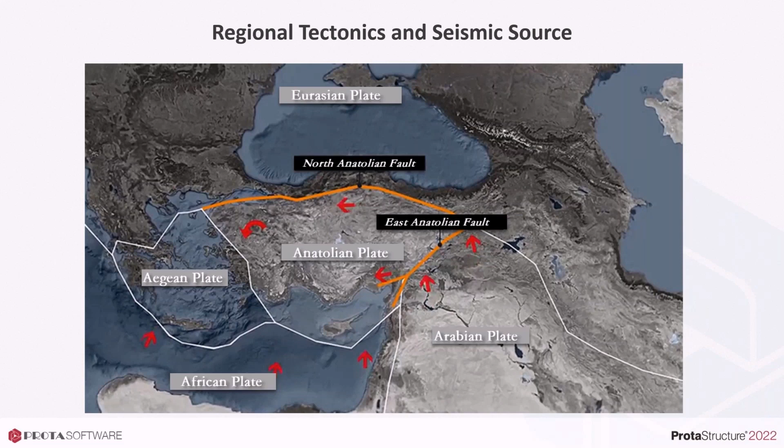Knowing this fact, Turkey is wired with a fine network of accelerometric stations on different types of soil conditions.

Here you see the PGA contours for the first earthquake. PGA, peak ground acceleration contours, are an important demand parameter regarding damage, since it is directly proportional to force. We measured PGA values up to 1.4 G in the first earthquake and 0.6 G in the second one. The white lines indicate the fault rupture in the two earthquakes. The PGA values are specifically high in the Antakya, Hatay region, possibly because of soil amplification.

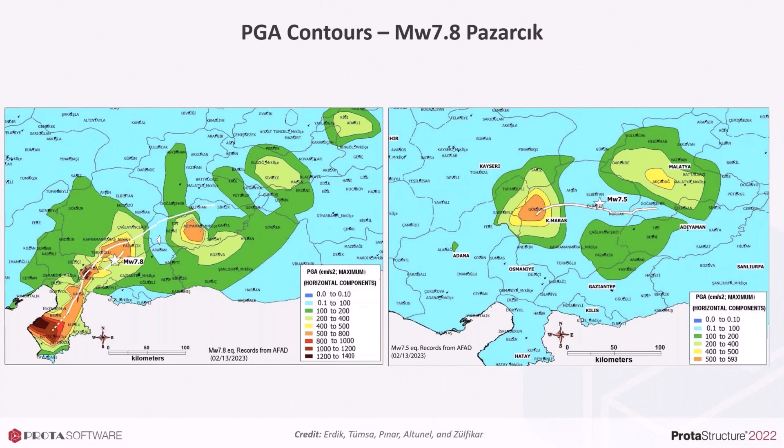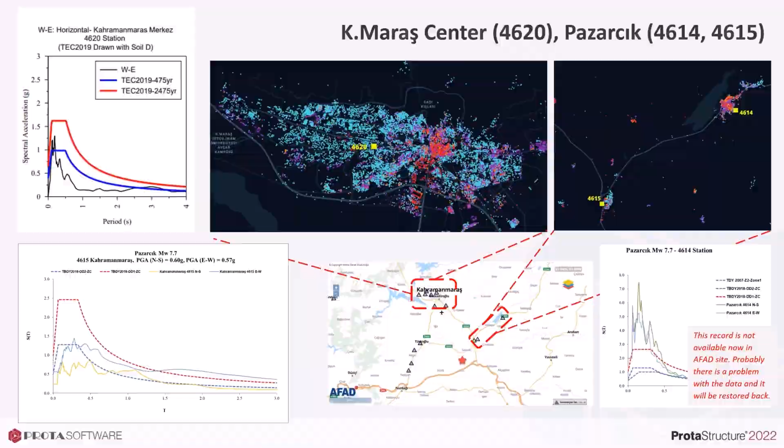A similar scenario is observed for Gaziantep. In the city center, the code spectra seem to estimate the spectral acceleration demands well, and the new buildings should not be suffering collapse from this level of acceleration.

The 0.6 G spectral acceleration can cause damage for very old or deficient buildings, that is, 2 to 5 stories. I'm talking about the spectral acceleration graph on the right.

But for the spectral acceleration graph on the left, measured in Islahiye, one of the provinces of Gaziantep, 2 to 5 story buildings suffered a 2G spectral acceleration.

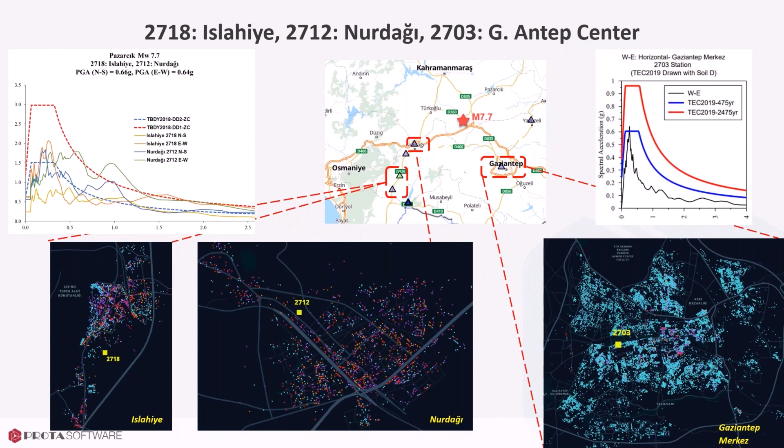Also in Nurdağı, another province, soil amplification is observed, and high spectral accelerations exceeding code values are experienced for 2 to 12 story buildings, which is basically the majority of the buildings.

Adana seems to be an interesting case. The observed spectral accelerations are under design and maximum considered earthquakes, and in the city center, the values are also low. Despite this fact, 18 buildings collapsed and 85 buildings are heavily damaged, waiting for demolition.

Collapsed buildings are between 12 and 20 stories, and it may not be immediately obvious from acceleration spectra, but when ADRS and spectral velocity graphs are plotted, it seems that buildings with 1 to 2 second periods seem to experience relatively larger demand in the city center.

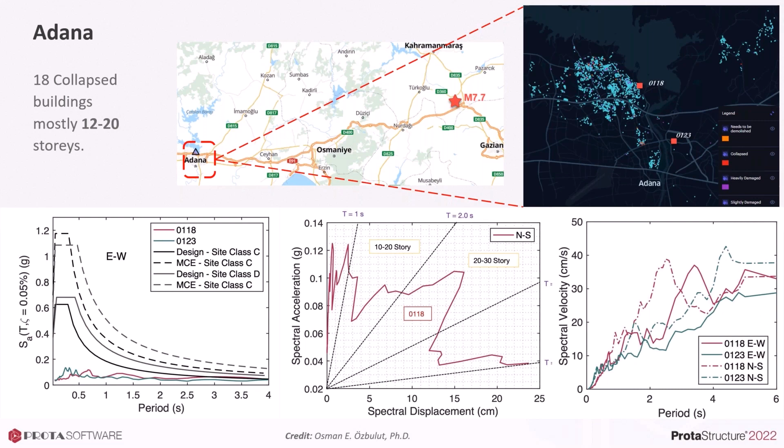After this overview, I'd like to show you some of the damage and structural deficiency that I observed in the earthquake region.

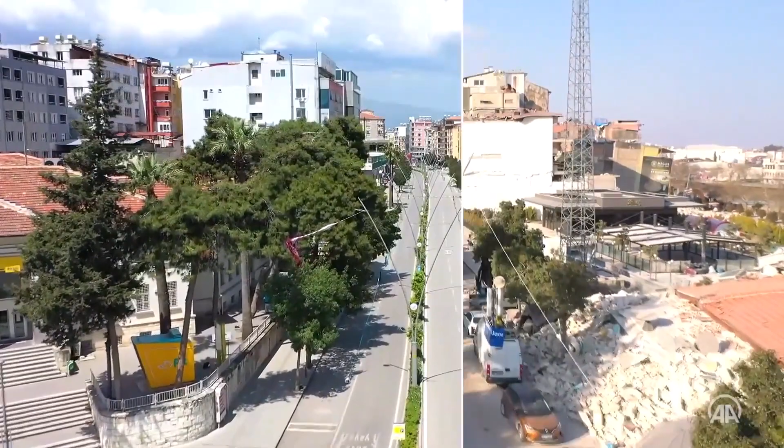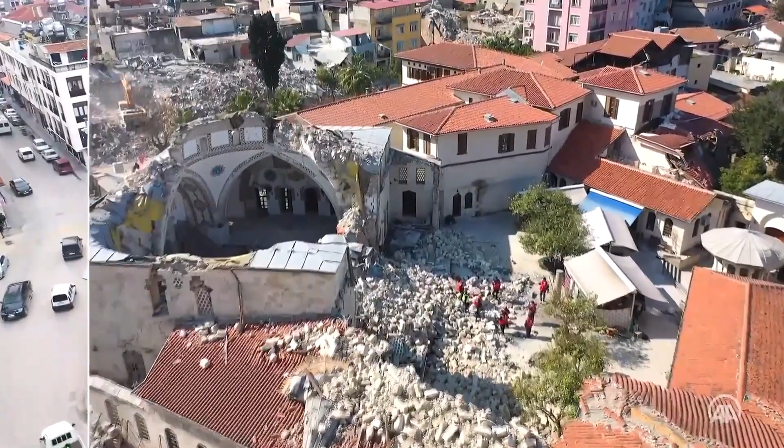Let's take a moment together and watch this aerial view that shows Hatay before and after the earthquake.

One of the mostly encountered damages regarding material quality is the brittle failure of rebars. In reinforced concretes, we don't really expect the reinforcement bars to fail like a brittle chalk. So these rebars are most likely untested and do not meet the production standards in terms of carbon content. The rebars should be ductile, not brittle.

Majority of the buildings in the region have insufficient lateral stiffness that results in, if not collapse, a high damage in structural and non-structural members. Unfortunately, it is not common practice to use shear walls in buildings in Turkey. If shear walls are used, the ratio of shear walls to total area is not usually sufficient, and they are mostly used in minimum dimensions required by the code. Also, architectural design does not allow the use of shear walls at the building perimeters. Combined with poor construction and poor supervision, frame-only structures are most likely to suffer damage or collapse. That's what we observed.

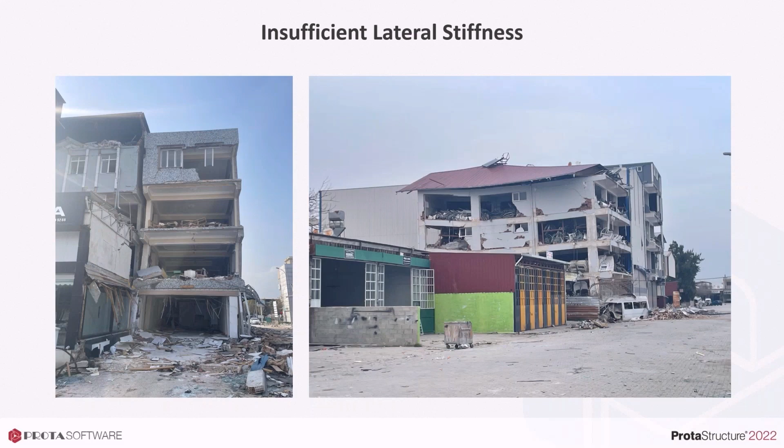These two examples are bad habits in Turkey's structural system formation. First, due to permit reasons and to enlarge the commercial area at the upper floors, heavy closed cantilever portions are used in the structural system. Also, architects prefer a flat ceiling and want light inside the room. So this results in discontinuous frames, as you can see in the pictures.

This is a typical floor plan that can be encountered in practice. The only shear walls are utilized in elevator and stair shafts, and they are asymmetrically positioned at the edge of the building, with building floor area enlarged at the upper floors using cantilevers. You can also see the beams missing on axis A, which creates an additional lack of lateral stiffness.

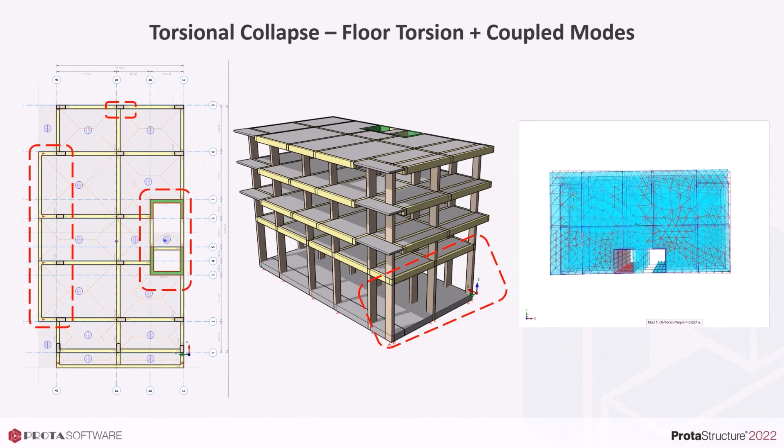This results in torsional irregularity and insufficient lateral stiffness, and also causes mode coupling. This is the observation in one of the buildings - it collapsed with a rotational movement.

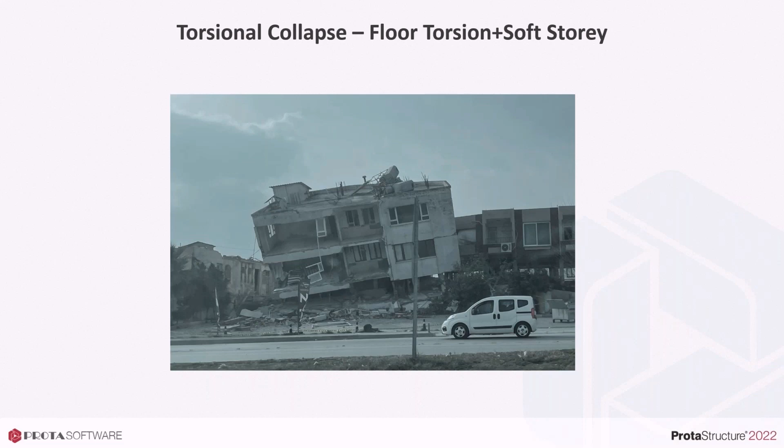Settlement and liquefaction issues are also observed on the site. The reason is construction on cohesionless alluvial deposits with high water table without any ground improvement, such as jet grouting, etc. We have also observed incidents of sand boiling and settlements in the basements, especially in the Iskenderun region. This means structural design itself is not sufficient - a good structural design is necessary, but also a good geotechnical design is necessary. If one of them is missing, you will observe damage in the foundation.

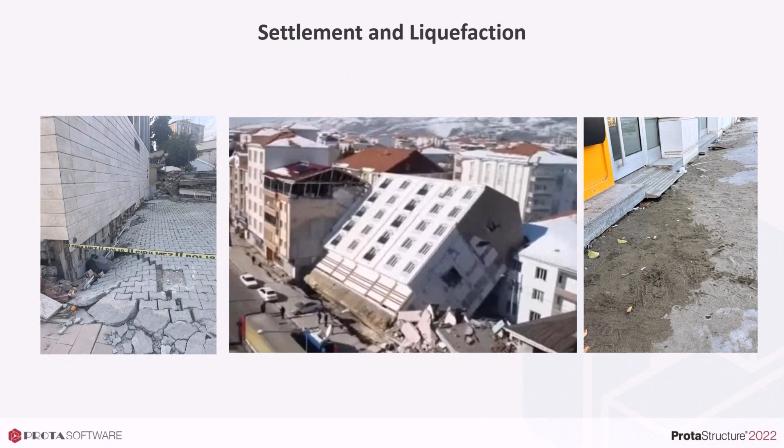This picture belongs to a famous residence complex in Antakya, which killed hundreds of its residents, unfortunately. Besides reported lack of detailing, material quality and segregation issues, the structural system itself seemed to have little tolerance for overturning. The three blocks are sitting on a common L-shaped monolithic basement, which is also considered to contribute to the damage and collapse. Due to the aspect ratio of the building, the structural system seemed to lack redundancy, and because of this, the columns and walls experienced a lot of axial stresses, bending stresses, and exceeded their capacities. And of course, the old buildings.

Turkey has a very large old building stock. According to Turkish Statistic Institution, approximately 50% of the buildings in the 11 affected cities are built before the year 2000. This is more or less the same for the entire country. 2001 is the year Turkey started utilizing building control regulations in 19 pilot cities, but it was only after 2011 that building control was in effect for all of the cities.

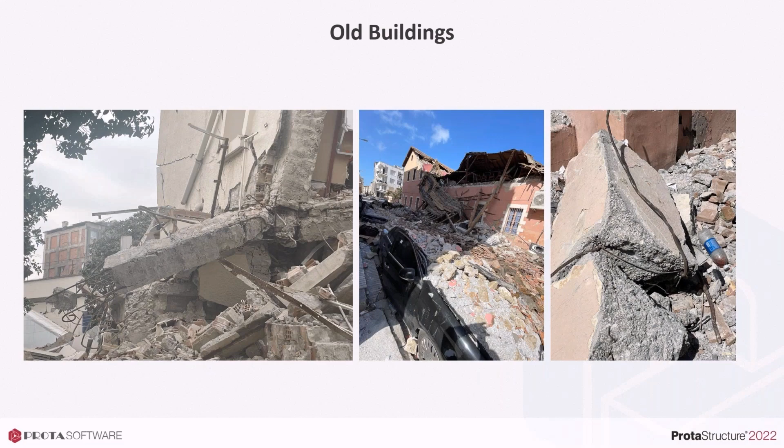So these were the observations in the earthquake region. After these insights on the earthquake that happened in Turkey, I'd like to also cover the seismic code coverage and parameters, what we do in Prota Structure to allow you to design safely against earthquakes.

First of all, Prota Structure supports a wide range of international seismic codes. The scope includes base shear calculation, irregularity and building checks, seismic design and detailing. Eurocode 8 and national annexes, Romania, Turkey, IBC, UBC, Philippines, Indonesia, India, Thailand, and Peru seismic codes are supported currently. We are working on Colombia and Dominican Republic codes to implement them in the software.

But as you can appreciate, supporting a seismic code is a challenging task with a lot of details. It's not always possible to support every clause 100% for every structural scenario. We are continually preparing and publishing design guides, knowledge base articles, and code coverage documents to be as transparent as possible for the parts of the codes we support.

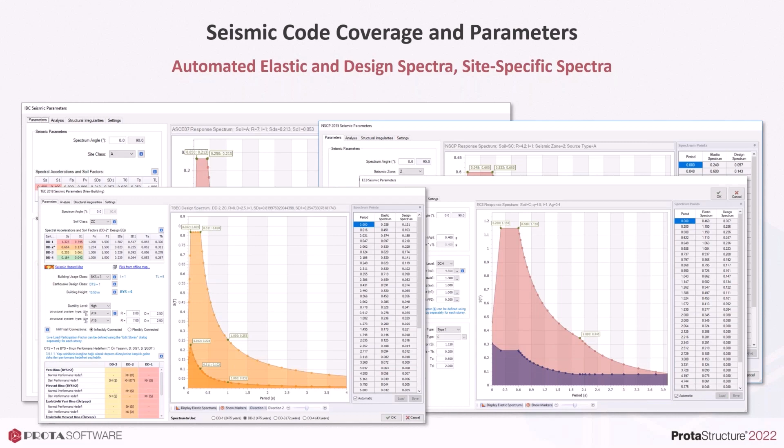Prota Structure provides a comprehensive wizard for parametric calculation of elastic and design spectra according to the chosen seismic code. For weak soil conditions or special one-off projects, you can also introduce user-defined site-specific spectra. Prota Structure allows you to use different design spectra for two orthogonal directions, meaning you can use different structural systems in each direction for a more economical design.

As a comprehensive solution for seismic design, Prota Structure automatically compares response spectrum base shear to the equivalent static base shear and scales up the internal forces and displacements. This scaling is not done up to 100% of the equivalent static base shear, of course, this depends on the selected seismic code.

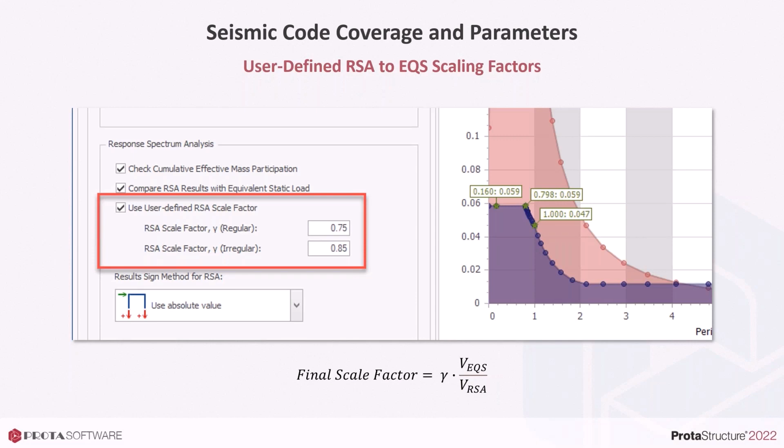Besides, the scale factor changes with the existence of any structural irregularity in the system. Usually, if the structure is irregular, there will be a penalty in base shear scaling by utilizing a larger factor. So RSA scaling factors for regular and irregular cases are user editable in Prota Structure. You can override the code-based values using the options.

As important as the seismic parameters, the modeling for seismic design is also very important. So I will walk you through the advanced model options in Prota Structure that will help you navigate and perform the seismic design.

First of all, diaphragm assumption, rigid diaphragm or flexible diaphragm, is one of the major considerations in building type structures. Prota Structure has comprehensive options for diaphragm modeling.

Prota Structure will automatically detect the existence of one or more rigid diaphragms on a floor level by checking the touching or stepping slab boundaries. You can even exclude some slabs from diaphragm contribution. As a result, a floor level can consist of a single rigid diaphragm, multiple independent rigid diaphragms, free nodes, or their combinations. Regardless of the slab conditions, you can force the entire floor to act as a single rigid diaphragm or no diaphragm at all.

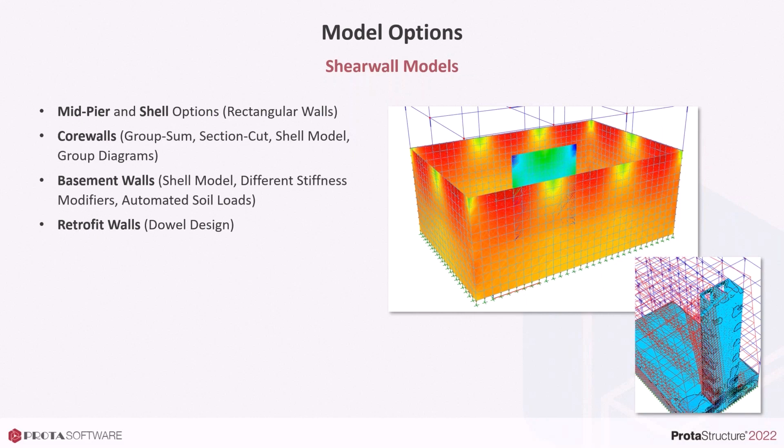Rectangular wall panels in ProtaStructure can be merged into complex core walls. Analysis, design, and detailing are done considering the combined section. Core walls are always modeled with shell members in ProtaStructure, regardless of the default wall modeling option. That's because core walls usually exhibit a torsional behavior, depending on the structural configuration, of course.

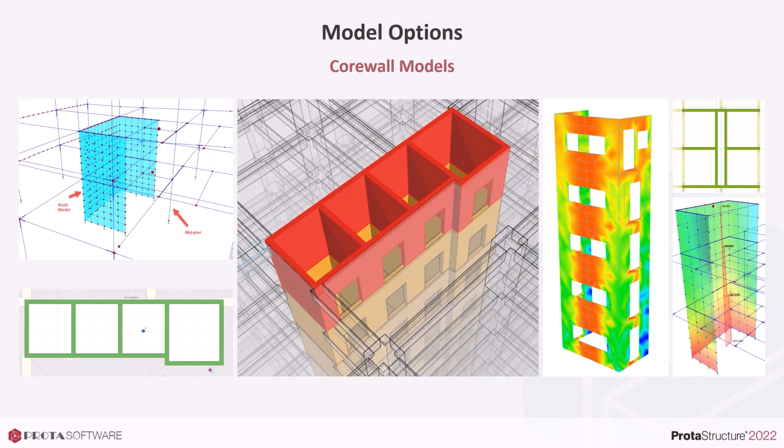It's also possible to display the internal force diagrams of rectangular or core walls modeled with shells. Group sums are automatically calculated for the core walls, and a single diagram is displayed. Since I mentioned group sums, what I mean is in order to come up with a single design force or moment in a wall system, we have to use section cut definitions, group sums or piers. In every software, a different terminology is used.

We automatically perform the group sum operation and give you the design forces in a complicated wall shape. So when we export the analytical model to software like SAP2000 or ETABS, we automatically assign the section cut definitions and the pier definitions in those software as well. So this is a very strong analytical BIM link to this software.

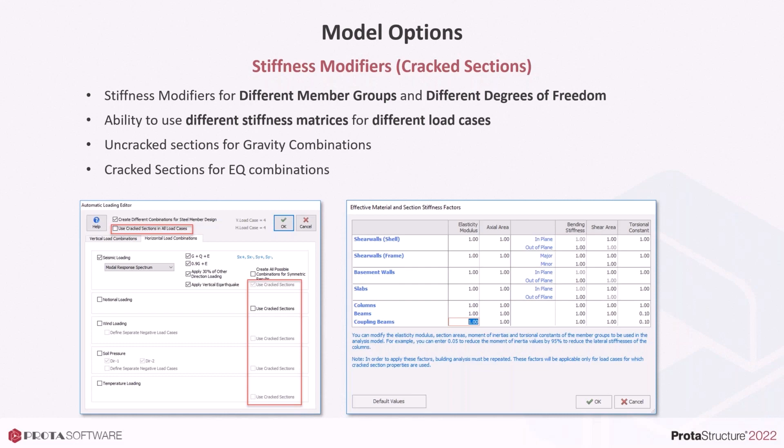Seismic codes may require the use of cracked section properties for different member groups and different degrees of freedom. So in ProtaStructure, we provide you with an extensive table for specifying the section modifiers with default values complying with the selected seismic code. You can even use the stiffness modifiers only in some of the load cases. That means you can use uncracked sections for a gravity combination and cracked sections for a lateral combination. ProtaStructure will internally use two stiffness matrices for calculating the results.

Depending on the design code and the seismic code you have selected, ProtaStructure saves you time and automatically generates the load cases and combinations. You just need to specify the gravity and lateral loading options. Combination factors are determined based on the selected code of practice. You can then customize the load cases and combinations further.

Maybe the most important step for a seismic analysis is the calculation of the masses in the structure. ProtaStructure derives the masses from various sources such as self-weight, imposed loads, user-defined loads, slab loads, infill wall loads, snow loads, and user-defined vertical load cases. In addition to this, each story can have different occupancy and live load participation factors.

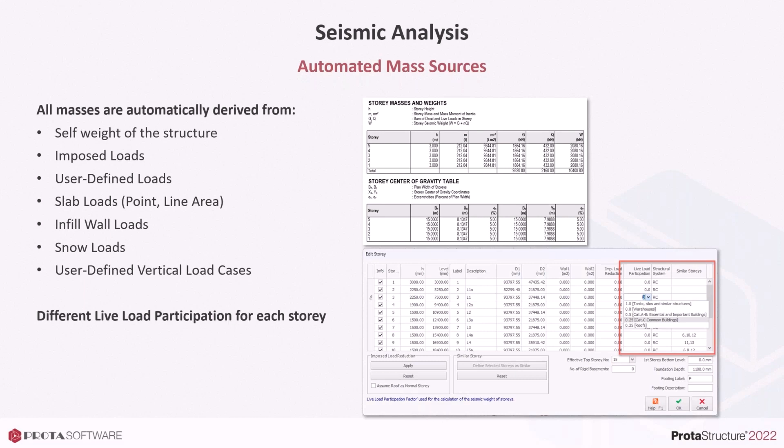At the heart of the seismic analysis is the determination of undamped free vibration modes of the structure. These modes are used in equivalent static or response spectrum analysis. ProtaStructure automatically calculates the vibration modes by a 3D subspace iteration eigenvalue analysis. Dominant modes are detected and sorted with respect to their mass participations. Cumulative mass participation is also checked in response spectrum analysis.

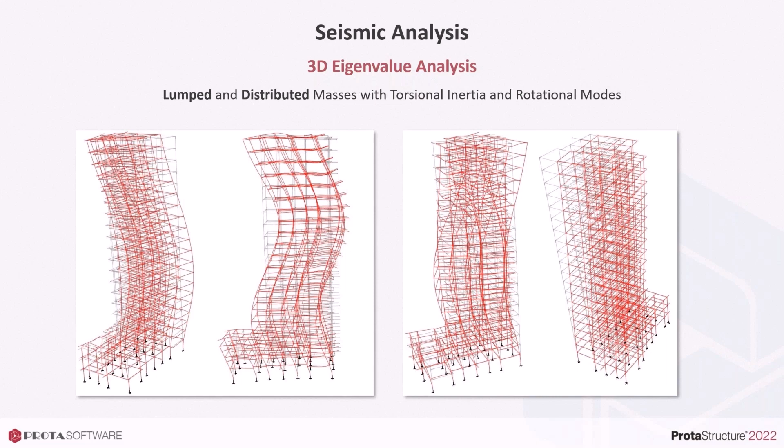Masses can be lumped or distributed with rotational inertia, and 3D torsional modes and local modes can easily be detected. The calculated period of vibration is automatically compared with the upper limits in the seismic codes, which are calculated by empirical formulas or Rayleigh formulation.

The simplest method of base shear estimation is the well-known equivalent static load method. This method makes use of the dominant mode of vibration in each direction. ProtaStructure automatically calculates the base shear and distributes it to the story levels by using seismic mass and the story heights. If there are multiple diaphragms or free nodes, load is shared among them. Accidental eccentricity is automatically calculated. Irregularity penalties are automatically applied.

Unlike equivalent static load methods, the response spectrum analysis can take the higher mode effects into consideration. The modal responses are combined with the CQC method. ProtaStructure can incorporate the additional eccentricity in modal analysis by introducing the eccentricity load vectors during the analysis. Code checks such as RSA to equivalent static amplification and cumulative mass participation checks are automatically done.

After the CQC combination, the signs of the results are lost, and you can choose whether to use the dominant mode signs or absolute values for forces and displacements.

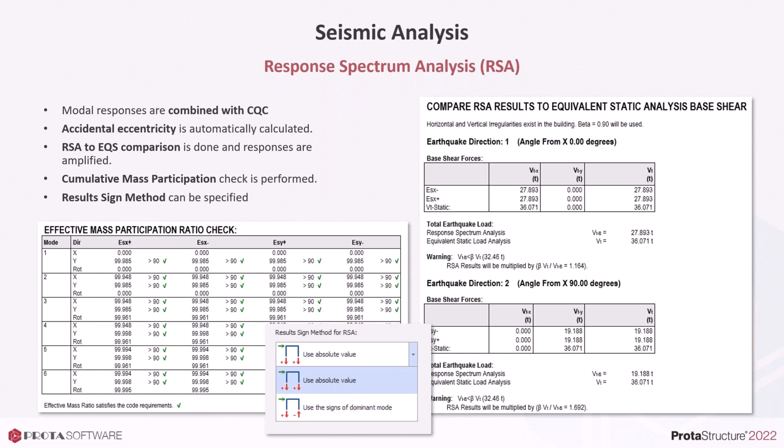Vertical earthquake components can be prominent, especially if the building has large spans, transfer beams, transfer floors, long cantilevers, discontinuous columns, etc. The vertical component can cause unexpected axial strains and vibrations. Seismic codes usually calculate the vertical component as a percentage of the horizontal component and amplify the gravity load case results. ProtaStructure follows this simplified methodology as explained in the codes.

But for some cases, codes require a vertical modal analysis to take the vertical components into consideration with the help of a vertical acceleration spectrum. But this methodology, of course, requires a careful identification of vertical masses and detection of necessary vertical local modes.

Seismic design of buildings with basements requires special attention. Since they are usually underground, the earthquake forces calculated for the basement stories must be handled differently and integrated into the superstructure. Besides, basements are usually excluded from irregularity checks.

On top of this, some of the seismic codes require using a different stiffness modifier for basement walls. Besides, because of their aspect ratio, the basement walls must always be modeled with finite element shell elements. That's why we support a dedicated basement wall type in Prota Structure.

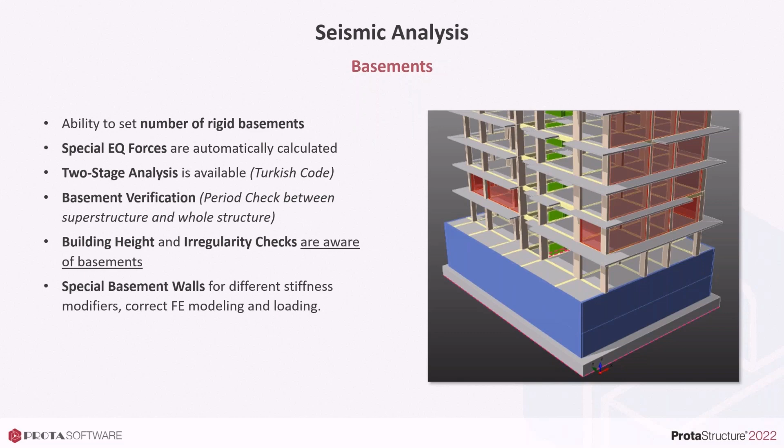Since the stiffness properties of the basement stories are different than the superstructure, the seismic codes usually require a two-stage analysis of such structures, where basements and superstructure are analyzed separately and the results are combined. Prota Structure can utilize different mass and stiffness matrices to perform a two-stage analysis.

In the first analysis, basement masses and seismic loads are eliminated or ignored. Only the mass of the superstructure is used. Stiffness of the basement story is still considered. In the second analysis, mass of the upper structure of the building is ignored, and only the loads in the basement story are calculated. But of course, stiffness of the upper story is still considered, and then the results of these two analyses are combined.

Especially for buildings with basements, the determination of building height is a vital step. In Prota Structure, the user specifies the number of rigid basements. In other words, the user decides the building height and building base. However, the basement stories need to satisfy certain conditions in order to qualify as basement. One method is to compare the superstructure period to the entire structural period.

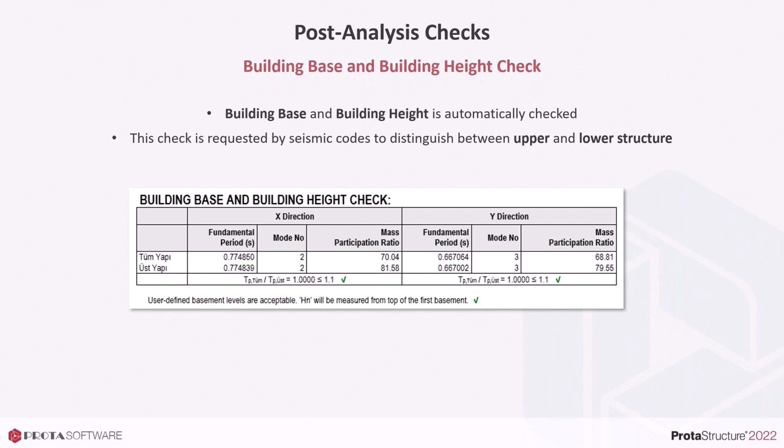Of course, the rigid basements should also physically satisfy the required conditions. That means they should have surrounding basement walls and have a significant stiffness difference from the upper structure. After the verification of building height and building base, Prota Structure will calculate the seismic loads considering the basements and exclude the basement stories from irregularity checks.

Building effective top story is as important as the basement stories. Mostly the top stories include an elevator maintenance shaft or similar mechanical facilities. The supporting structure at the top story usually has lower stiffness and lower mass. Performing irregularity checks including the maintenance story may be unrealistic depending on the project.

So Prota Structure provides a tool for engineers to use their engineering judgment and set the effective top story of the building. The stiffness and mass of stories above the effective top story are still considered in the analysis, but they are excluded from irregularity checks.

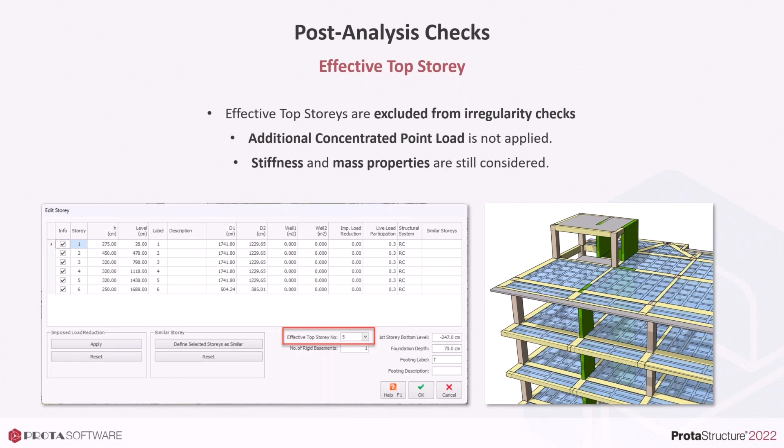ProtaStructure will check horizontal irregularities and apply the penalties automatically for the equivalent static load method. If torsional irregularity exists in the structure, Prota Structure will increase the additional eccentricity and repeat the analysis with the new eccentricity value. In case of excessive floor torsion, the equivalent static method will not be applicable and Prota Structure will warn the user.

Diaphragm discontinuity must be detected by the engineer, but Prota Structure provides the necessary tools to handle the cases where the rigid diaphragm assumption is not valid. As I said before, Prota Structure will check the slab discontinuities and exclusions and decide on multiple rigid diaphragms and free nodes on a floor level.

Flexible diaphragms can also be used where the rigid diaphragm assumption will not be valid and in-plane stresses need to be evaluated. For buildings having structural frames non-parallel to the specified earthquake direction, 30% of the other direction can also be applied in the combination wizard.

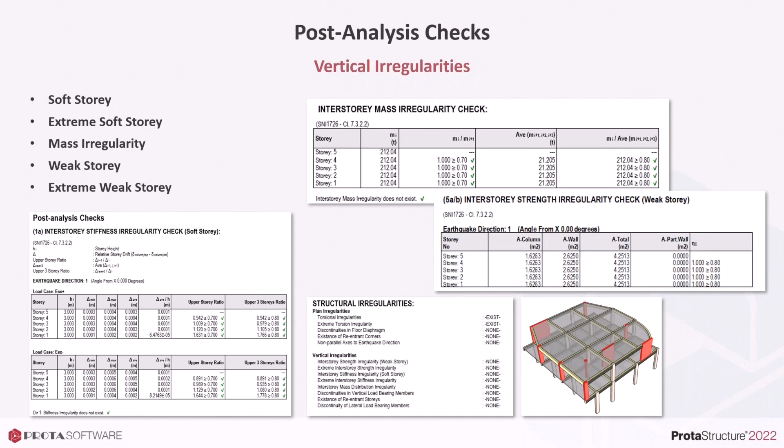Relative drift checks are always a major part of seismic checks and a strong indicator of damage vulnerability. Prota Structure performs the relative drift check for each story and presents it in a tabular format. The critical member exhibiting the maximum displacements is indicated in the report so that you can review it in your model. And the drift check in Prota Structure can also recognize and identify the intermediate nodes of a column that's inserted as a single piece from top to bottom.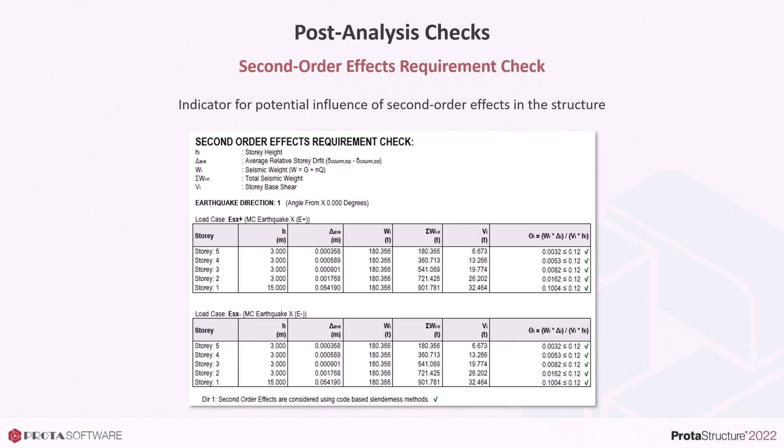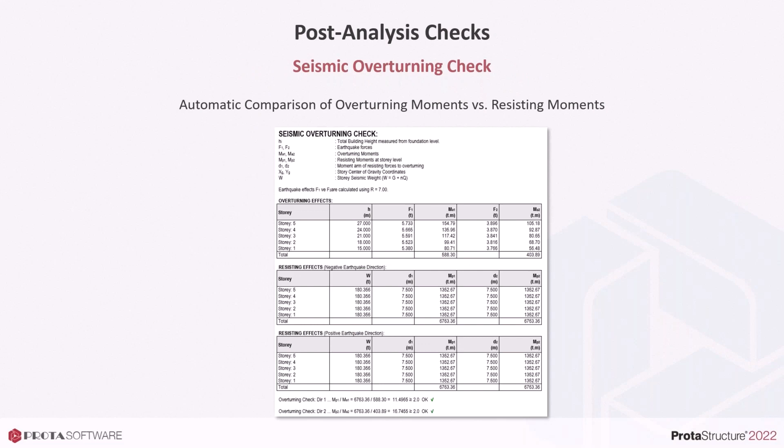Second order effects requirement is another important post-analysis check. It compares the moments created by the weight of the structure under lateral displacements to the moment created by the story shear. If the ratio is too high, then the structure may be susceptible to second order effects and a detailed review must be done. The seismic overturning check, as its name implies, is a stability check under seismic loads that compares the overturning moments to the resisting moments.

ProtaStructure can perform strong column checks of reinforced concrete and steel special moment frames according to ACI, Eurocode, and Turkish earthquake codes. In addition to this coverage, strong column weak beam reports are now developed from scratch to include more visual components with intelligent notifications.

For flat slab buildings or for buildings where we have floor plan irregularities, such as diaphragm malformation, large openings, or discontinuities, we must check the safe transfer of lateral inertial loads from slabs to the walls. This check simply calculates the unbalanced shear force between top and bottom shear wall and checks if this is resisted by shear friction on the shear wall slab overlapping surface.

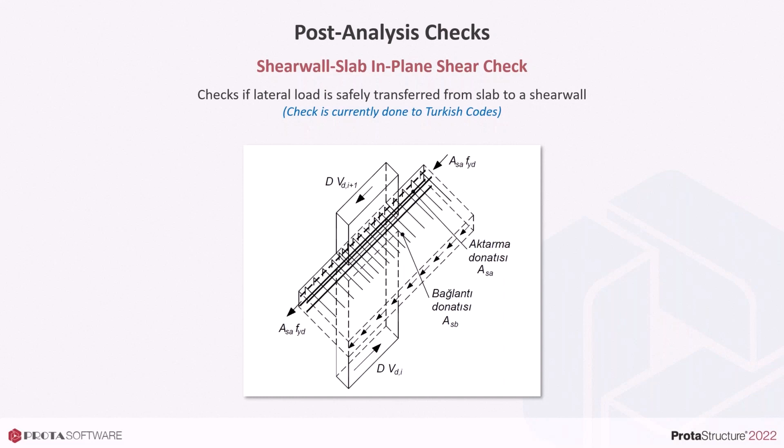If not, additional dowels are calculated. For excessive situations, additional longitudinal bars are calculated in the connecting beams. But the calculated additional bars must be manually provided by the user.

For the cases where rigid diaphragm assumption is under question or not valid, we must check if the lateral inertia forces are transferred safely by the floor. For this purpose, the in-plane tensile and compressive and shear stresses should not be exceeded.

Excuse me. ProtaStructure can also calculate the seismic forces acting on non-structural members and their connections to the building. All you have to do is to specify the non-structural member and their properties, and ProtaStructure will automatically calculate the story accelerations acting on that particular story, and then it will automatically calculate the forces acting on the non-structural member so that you can design their connections.

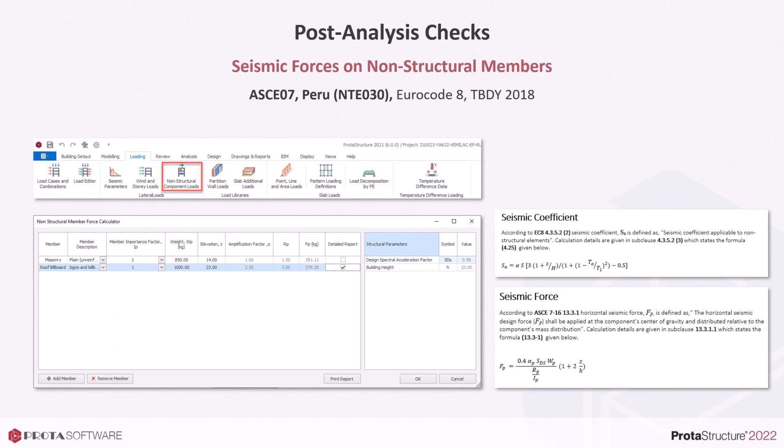And finally, to avoid pounding damage in adjacent buildings, we must provide spacing between structures. If you need to design the seismic separation between two buildings, you can use the seismic joint design tool in ProtaStructure. With this tool, you can either load the displacements of an existing ProtaStructure model, or you can enter the second model's displacement values manually. So using the displacements from two separate models, ProtaStructure will calculate the necessary amount of seismic gap between two structures.

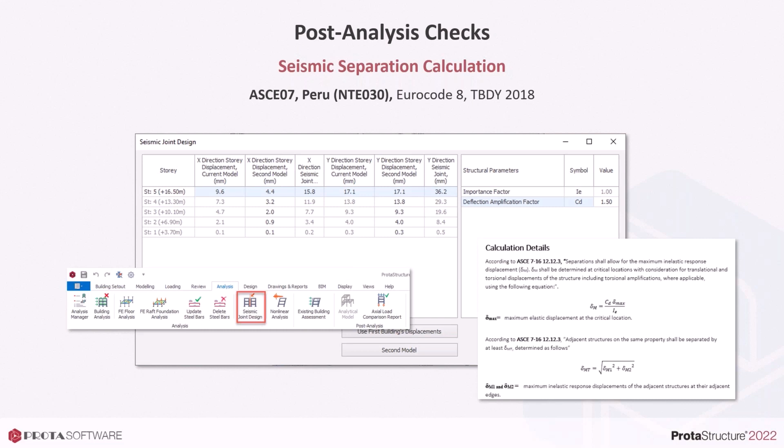So these capabilities bring us now to a different topic. We use these capabilities, of course, for the new buildings and for assessment and retrofit as well. So in terms of assessment of existing buildings or performance design of existing or maybe the new buildings, first of all, we offer our users a practical and seamless workflow for assessment and performance-based design.

If you have detailed blueprints of a building, you can enter the estimated or exact reinforcements in the members. First of all, modeling an existing building is no different than modeling a new building. All you have to do is just define the geometry and put the existing rebars, or if you don't know anything about the existing rebars in the existing building, you can just estimate the rebar.

Most of the time, existing buildings suffer from corrosion, and if you have blueprints of the building, the existing rebars may not be complying with the rebars in the blueprints. That's why we introduce corrosion and rebar realization factors. And you can enter these values for each and every member so that their capacities are reduced accordingly.

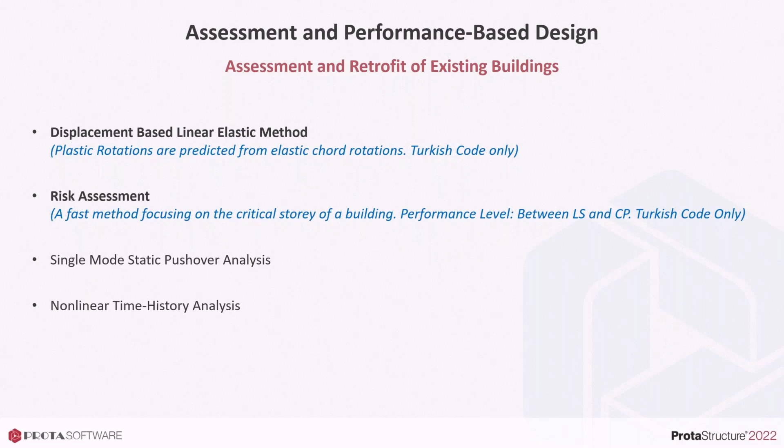The other analyses are single mode static pushover and nonlinear time history analysis, and these are the well-known analysis techniques in the industry, which are of course quite generic in conduct. However, material nonlinearity definitions may vary in different seismic codes. Currently, material nonlinearities and assessment is again done to Turkish codes.

One of the strengths of ProtaStructure resides in the ability to conduct nonlinear pushover and time history analysis for assessment and performance-based design. And we achieve this by the OpenSees integration. As you know, OpenSees stands for the Open System for Earthquake Engineering Simulation. It's an open source software for simulating the seismic response of structural and geotechnical systems.

But of course, nonlinear analysis requires a wide range of algorithms and solution methods, and OpenSees provides nonlinear static and dynamic methods for that purpose. In ProtaStructure, we communicate the analysis model to OpenSees with the help of TCL files. In addition to the detailed analysis model, nonlinear material properties are also automatically calculated and added on top of this model. The entire structure is then ready for a performance analysis.

For a successful OpenSees integration, a considerable amount of pre-processing and post-processing is necessary. All the material nonlinearities have to be generated and sent to OpenSees. Column, beam, and wall sections can be modeled with fiber elements and analyzed with state-of-the-art numerical techniques to derive the moment curvature relationships. Confined and unconfined concrete regions can be specified, and strain hardening in steel bars can be taken into consideration.

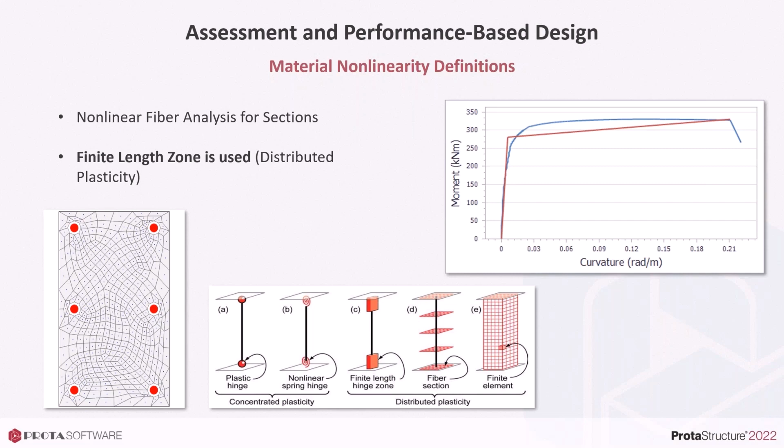For columns and walls, a finite length hinge zone model is used with 6 integration points. Force deformation relationships for integration points are obtained from fiber section analysis. Single mode static pushover analysis is performed using, again, OpenSees integration. Parameters such as number of steps and target displacement can be controlled by the user.

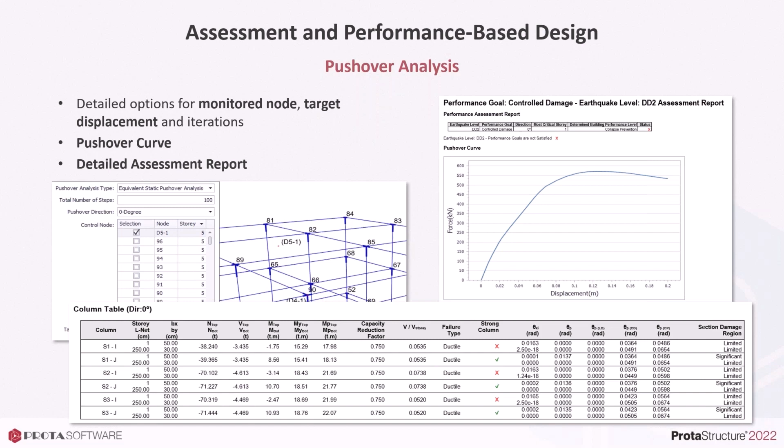After the analysis, the capacity curve is obtained. Users can specify the monitored node for which the curve will be generated. Results can be examined at any desired step. A detailed performance assessment report is generated after the analysis. A vital step after pushover analysis is to find the demand that a target code spectrum requires. It's also known as the performance point. After plotting the capacity curve, ProtaStructure can detect the target displacement value according to FEMA, Eurocodes and Turkish Earthquake Codes.

A nonlinear time history analysis can be performed, again using OpenSees integration. A set of multiple ground motions can be applied simultaneously in X and Y directions. As specified by the earthquake codes, the ground motion application direction is rotated by 90 degrees and analyses are repeated. The selection of suitable ground motions is up to the user, of course.

You have to go to the ground motion database and select the suitable ground motions for your structure and for your structure's location. And in this selection, parameters like fault mechanism, soil properties, and magnitude of the considered earthquake are also important. But the selected ground motion records are automatically scaled by ProtaStructure using this simple scaling method.

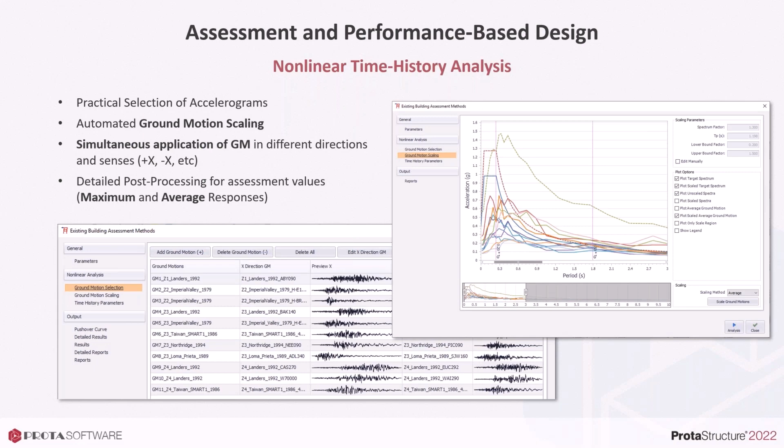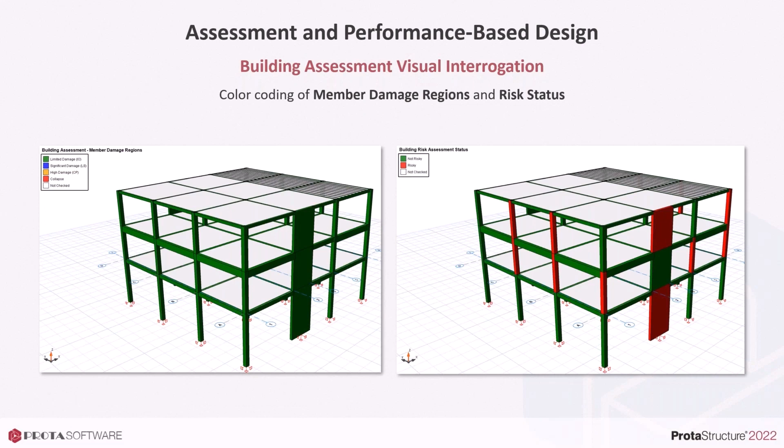After the time history analysis, the results from multiple ground motions are automatically post-processed. The average values of absolute maximum responses are extracted and used in performance assessment. You can also use maximum values if you like. And after that, a detailed performance assessment report is created. And to visualize the assessment results, ProtaStructure can present the member damage regions and risk status by the new color-coded visual interrogation options.

So after talking about these analysis and assessment methods, I want to briefly talk about the retrofit techniques, and that will also end my presentation. So one of the most utilized retrofitting strategies is to use reinforced concrete walls inside the existing frames. This method improves the overall lateral behavior of the existing building, especially by limiting the lateral deformations. In ProtaStructure, you can insert retrofit walls in your existing structures.

Modeling of the existing structure is no different than the new building, as I have specified. Before the assessment, you must provide preliminary longitudinal and horizontal bars in the retrofit walls. After the assessment, you can design the top and the bottom dowels that connect the retrofit wall to the existing frame. Of course, detailed drawings and quantity takeoffs can be done in ProtaDetails.

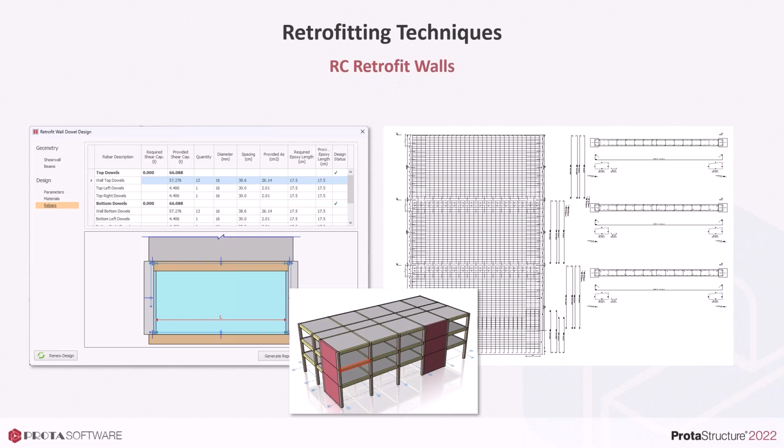Reinforced concrete column jackets can be used to locally improve the axial load and moment capacity of an existing column. Depending on the extension of the longitudinal bars into the upper story, the reinforced concrete jacket can resist moments or not. This can be set as an option in ProtaStructure. If the existing column is too damaged or weak, you can also delete the existing column from the model, if you like.

ProtaStructure is also capable of retrofitting and assessing beam and column members confined with carbon fiber reinforced polymers, which we call CFRPs or FRPs. The FRP confinement has a positive effect on the shear resistance and axial load capacity of the members because of the extra confinement they provide. Currently, ProtaStructure can consider these effects according to the Turkish codes only, and US and Euro codes guidance will follow.

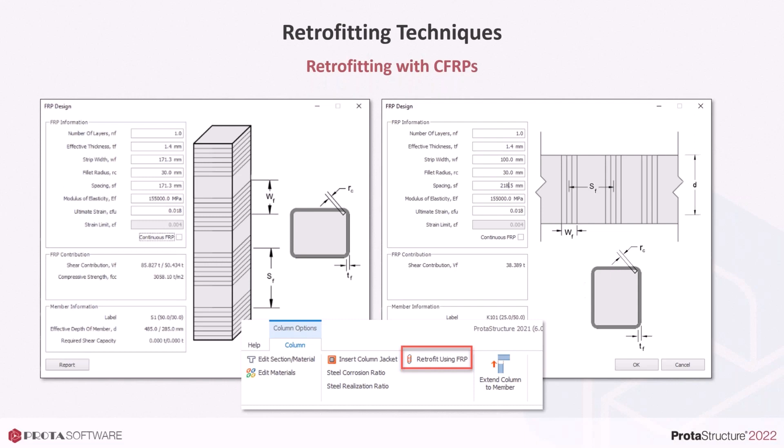So base isolation is a separate topic in itself. We could talk about base isolation for maybe a couple of hours. Base isolation can be used as a retrofitting strategy or as a strategy in new buildings. But currently, we do not really prefer base isolation for existing buildings, although we have examples of it in the world and in Turkey. If the building is too weak, retrofitting it with base isolation may not be economical and may be really difficult in practice.

And also, the building may not be strong enough to resist the activation force of the isolators or even the lower accelerations in the upper story. So base isolation is usually a good solution for brand new designs. Base isolators simply concentrate the lateral deformation at a relatively soft isolation layer. They also elongate the vibration periods of the building so that less spectral accelerations are experienced overall. However, soil conditions must be carefully investigated for a possible resonance situation.

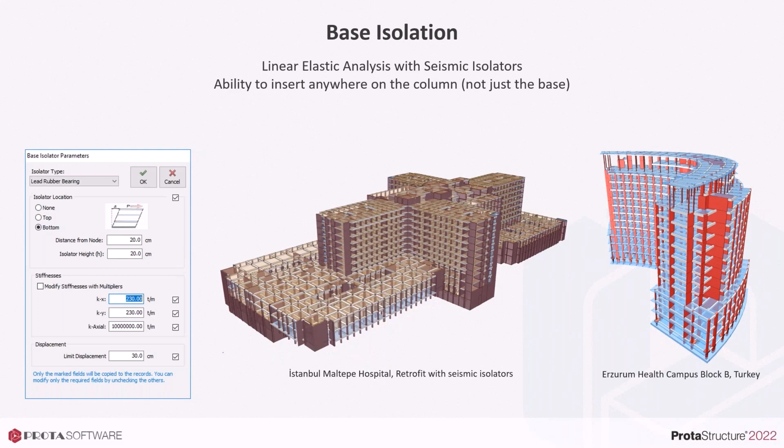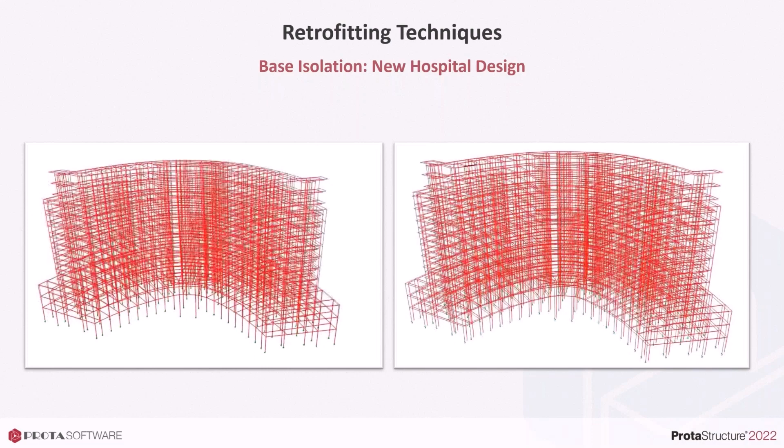Please note that currently you can only perform a linear elastic analysis with base isolators in ProtaStructure. That means they can be used to design and verify the upper structure. This example is a new hospital design. Here you see the base isolated model on the right and the conventional fixed foundation option on the left. The base isolated model clearly exhibits a rigid body deformation at the superstructure, as you can observe.

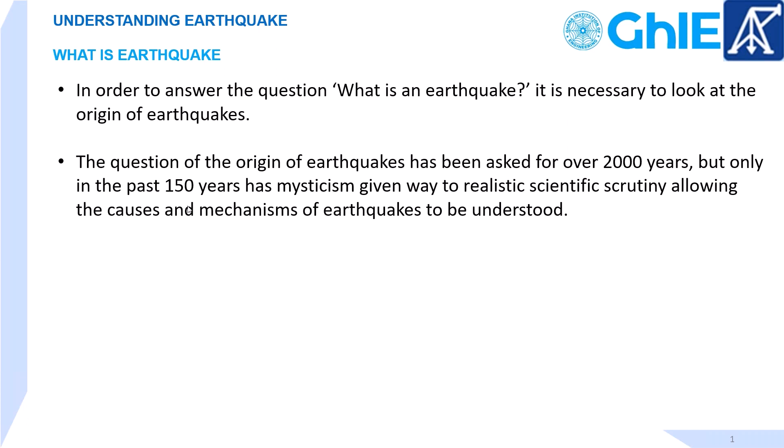It is only in the past 150 years that mysticism, and I know that the mystics in Africa, in Ghana, this thing would be very welcome, we say oh maybe this is caused by some spirits, but I can tell you that there's a realistic scientific scrutiny, and that has brought about the understanding of the mechanism of earthquakes.

A geologist who lived in the 1800s, G.K. Gilbert, was the first to suggest that earthquakes were the result of displacement along geological faults, based on observations of the Wasatch Mountains in north-central Utah, USA, in the 1880s.

When we say faults, faults are basically fractures in the Earth's surface along which displacement occurs. So you can have a crack in the rock forming the Earth's surface, and that may constitute a fault. These are fractures in the Earth's surface, and you may have observed that when you subject a rock or concrete to a compression test in the laboratory, you find there's a crack or shear failure. This is the kind of thing we are talking about.

I always try to use the example of being behind a door, and somebody is pushing the door, you try to resist that movement. Now, if the person leaves the door, you know what is going to happen? There's going to be a release of that energy that you have been using to push or close the door. And this will release the energy. But in the case of rocks, what happens is different.

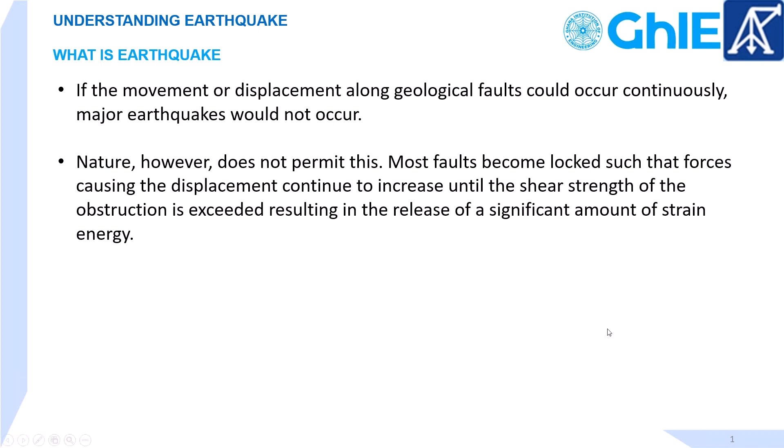Once there's an earthquake, there's going to be shaking. There's a radiation of seismic waves, and they propagate in all directions. They travel outward from the source of the earthquake, along the surface and through the earth, at various speeds depending on the material through which they move. Some of these vibrations are of high enough frequency to be audible. Sometimes, even in Ghana, when there is a little bit of tremor, we feel and sometimes hear whatever is happening, so there's a kind of trembling of the earth.

I do not intend to go too much into this detail, but the slides could be shared. The observations of the aftermath of the 1906 San Francisco earthquake allowed Reid in 1910 to propose the theory of elastic rebound to explain the mechanics of earthquakes.

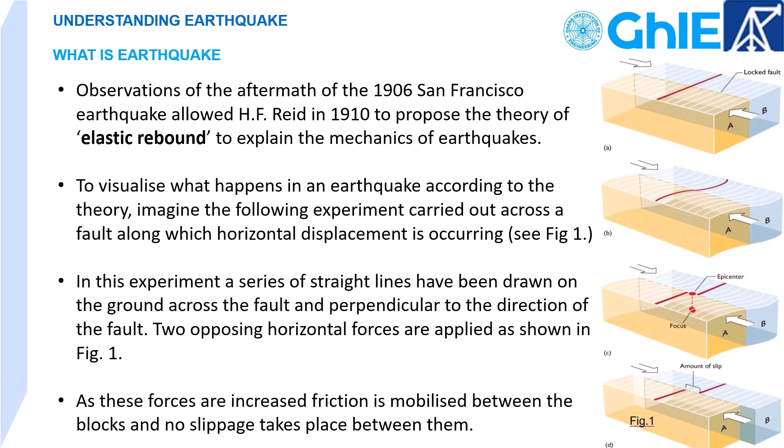If you look at figure 1B, you see that when there's an earthquake, there's movement between two sections. The first one at the top is straight, but the second one moves independent of the first. That is the one colored brown and the other colored blue. So you can see there's a deformation of the line. You could also have subsidence or slip. These are all part of the explanation of how earthquakes happen. This is just to illustrate it.

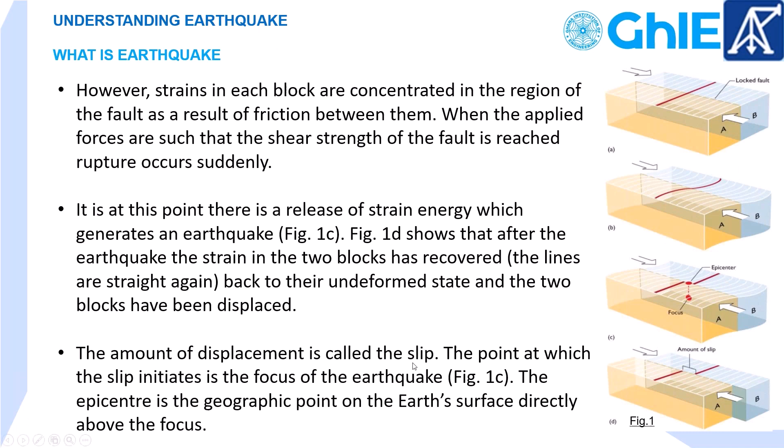I do not want to go through all of this, but when these forces are applied, the shear strength of the fault is reached up to a point, then it ruptures suddenly. Once it ruptures, there's a release of this strain energy, and that is what generates the earthquake, along with a displacement.

By definition, an earthquake is the vibration, sometimes violent, of the Earth's surface that follows the release of energy in the Earth's crust. This energy can be generated by a sudden dislocation of crust segments, volcanic eruptions, or even man-made explosions. So it is not always generated just by natural causes. Sometimes, as a result of mining activities, you can trigger an earthquake.

Based on the medium in which these earthquake waves travel, they can be classified as body waves or surface waves.

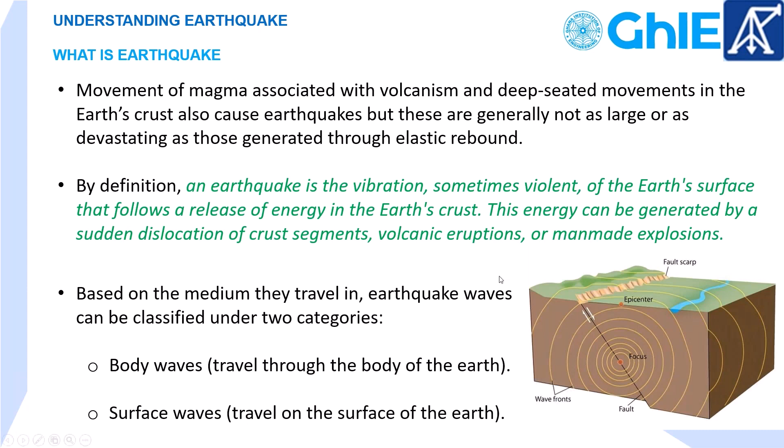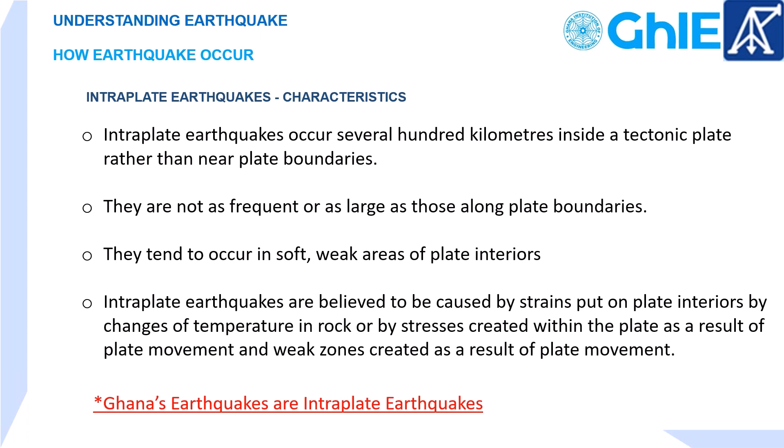The question one may ask is how earthquakes occur and their characteristics. We have intra-plate earthquakes, between plates, and these happen. These intra-plate earthquakes are not as common or as frequent or as large as those along the plate boundary. If you take, let's say, the Eurasian plate, you can have some earthquakes occurring within that plate, but these are not as frequent.

They tend to occur in soft, weak areas of plate interiors. But the most important ones, and of course the ones we see in Ghana, are mostly intra-plate earthquakes.

Now let us look at the primary effects of earthquakes. This is where we, as engineers, should be worried. The primary effect of an earthquake is ground shaking, and the nature of this ground shaking at any given location depends on the effects of the earthquake source, that is the fault, the path through which the waves travel, and the site on which the eventual ground shaking occurs.

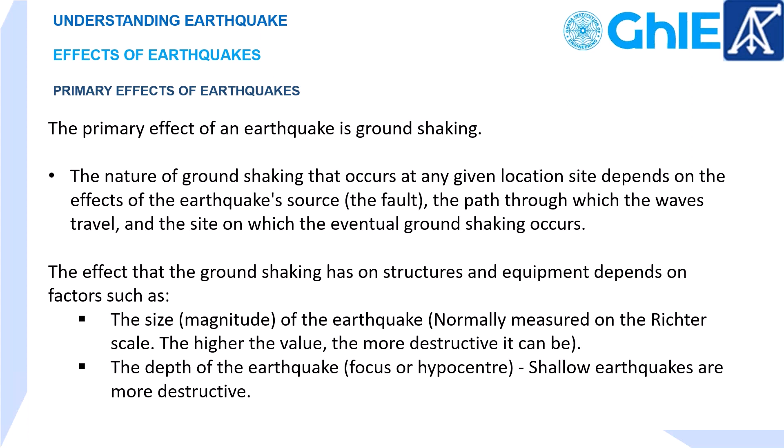For instance, if it is on soil with high water table, silty soils or sandy soils, then it could be subject to liquefaction, where the soil loses its shear strength within a very short time, and that can lead to subsidence or the collapse of buildings, or whether it is on rock. So the soil or rock on which our buildings are located is also important in the response of the building to earthquakes.

The effect is generally severe at the point directly above the focus, that is in areas around the epicenter, and decreases as the distance increases from the epicenter. For instance, in Ghana, we will see that the epicenter was so many kilometers away in the sea, or at Nyanyano or at any other set place.

You could also have local site effects, where softer or less compact grounds, even further away from the epicenter, may have higher intensity or amplification and longer duration of shaking, and therefore higher damage potential.

In the Turkey earthquake, which was also mentioned, the amplitudes or effects of the earthquake were very, very small, but that still caused extensive damage. So the local effects, or the soil under which the structure is located, are also as important.

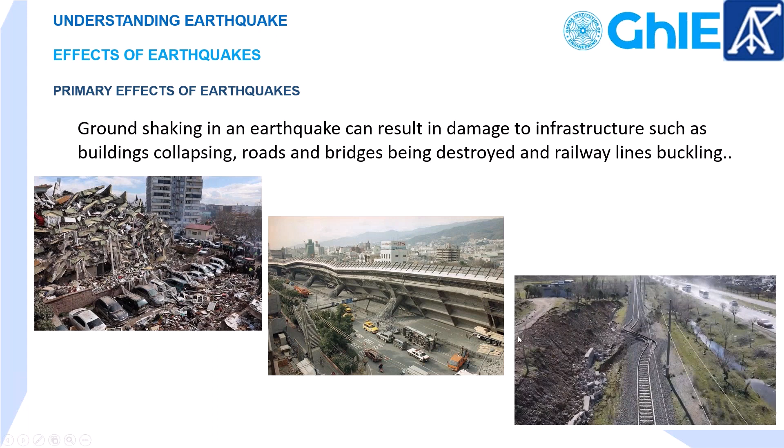Now, having this background, let us look at the Ghana earthquake. Geologically, Ghana lies along the southeastern margin of the West African Craton. The Akwapim mountain range, which lies in contact with the West African Craton, is known to contain a number of faults which have been responsible for several earthquakes in Ghana.

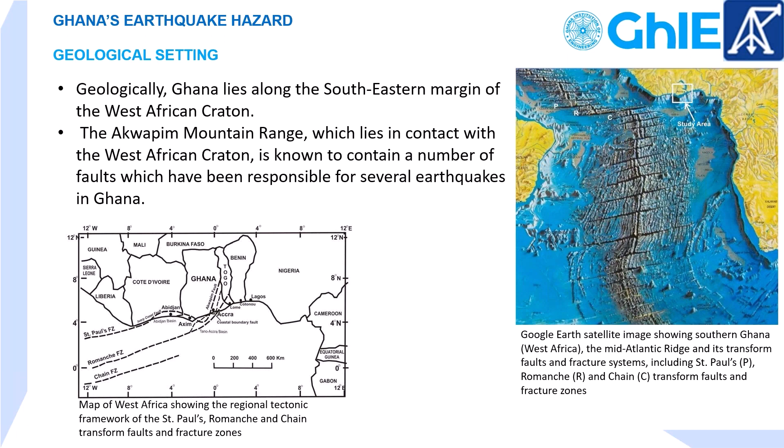So let us look at some historical records. Despite being very far from any major known tectonic interplate boundaries or active volcanogenic regions of the world, southern Ghana has been seismically active for centuries. Previously recorded damaging and destructive earthquakes have been reported in places wide apart in southern Ghana, most notably from the southwest in the districts of Axim and Elmina, to the southeast in Accra, and all the way to the Ho district. Very, very wide - we are talking about 600 kilometers.

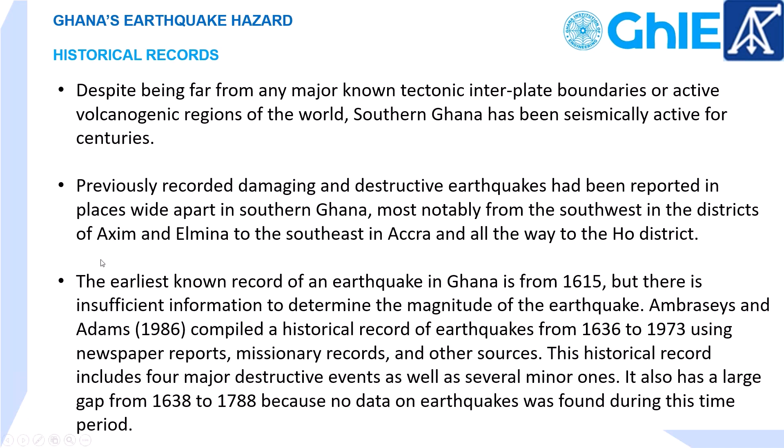The earliest known record of an earthquake in Ghana is from 1615, but there's insufficient information to determine the magnitude. In 1986, Ambraseys and Adams compiled a historical record of earthquakes from 1636 to 1973 using newspaper reports, missionary records, and other sources. The historical record includes 4 major destructive events. The one we remember most is 1939, but there have also been earthquakes in the past, from the 1630s to 1788.

In Ghana, we also have instrumental records, that is records taken up. And again, like I mentioned, this is information that is contained in the framework for earthquake response in Ghana that was commissioned in 2019. So I'm taking a lot of information from there, and we can always go to that document and get more detailed information.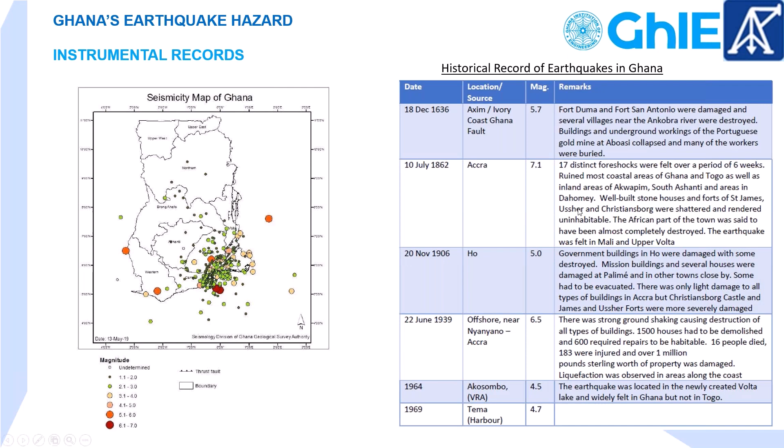So it is important that as engineers, we continue to bear in mind that whatever we do would require some introspection. Now, when we look at the instrument records, 6th March 1997, I remember this very well. There was a structure very close here at Kokomlemle. It collapsed. And that was only magnitude 4.8. You get it? And if you look at the recent earthquakes from 1997 to 2019, they have been very low magnitudes. And if this is causing some cracks in buildings, then what will happen if something like what happened in Turkey happens in Ghana? Again, I cannot stop talking about the need for us to be careful.

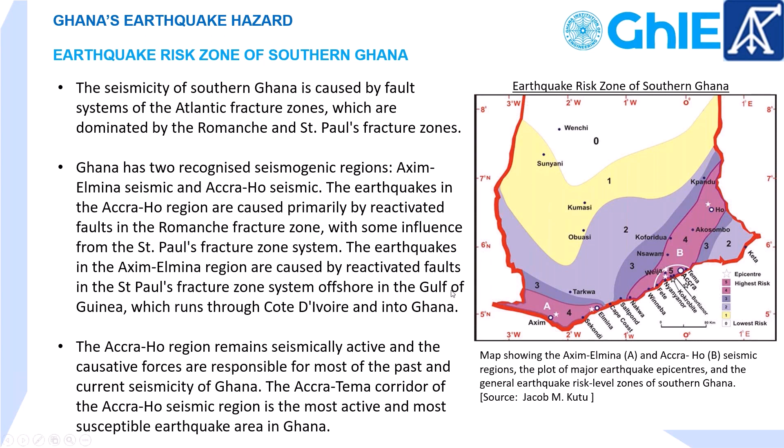I'm not going to go through all this because this is going to be made available for you, but just to recognize that our seismicity in southern Ghana is caused by a fault system of the Atlantic fracture zones, which are dominated by the Romanche and the St. Paul's fracture zones. We have 2 recognized seismogenic regions, that is the Axim-Elmina seismic and the Accra-Ho seismic. So you can realize that the whole of southern Ghana is within the earthquake zone, and it is important that we take precautions in whatever we do.

When you talk about earthquake resistant design, you do not design earthquake proof buildings. It is only resistant, and we have just gone through the methods by which we could do that. But then the basic principle is that there's a need for our designs to prevent building collapse during earthquakes and to minimize the risk of death or injury to people in or around those buildings. Because earthquake forces are generated by the inertia of buildings, and the inertia of buildings dynamically responds to the ground motion. And in terms of the dynamic nature of that response, due to the earthquake loadings and other building loads, you being the designers may be tempted to consider earthquakes as a very strong wind, and this must be avoided. This must be avoided, and I think we have seen that in the presentation that was given to us.

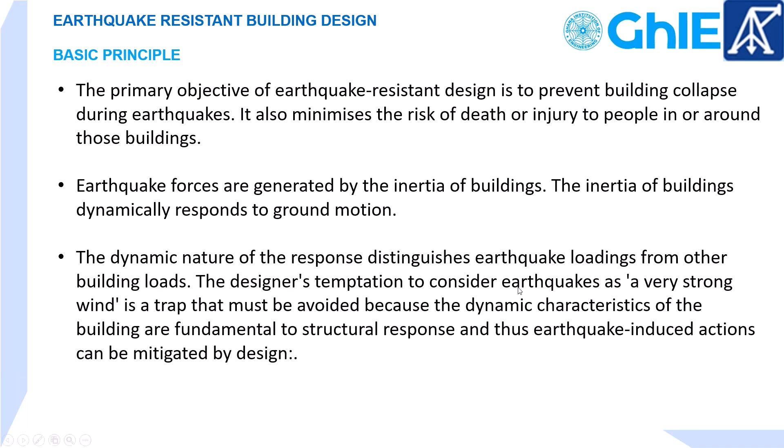The dynamic characteristics of our building are fundamental to the structural response, and earthquake-induced actions can be mitigated by design, and we have seen how Prota structure is able to handle that for us. It says that a good earthquake engineering design is one where the designer takes control of the building by dictating how the building is to respond. And this is achieved by the selection of the preferred response mode, selecting zones where inelastic deformations are acceptable. Again, this has been demonstrated to us in the software that was shown to us by the first speaker.

And then there are desirable mechanisms which are sufficiently strong to resist normal imposed actions without damage. At the same time, they are capable of accommodating substantial inelastic deformation without significant loss of strength or load carrying capacity. There are some mechanisms that have been found to generally involve the flexural response of reinforced concrete and steel structural elements, or the flexural steel dowel response of timber connections.

Undesirable post-elastic response mechanisms within specific structural elements have brittle characteristics, and they include shear failure within reinforced concrete, reinforcing bar bond failures, loss of axial load carrying capacity, or buckling of compression members such as columns. But then, what was shown to us, we saw the snapping of reinforcement. I have never seen anything like that before. It is not that the steel is bending, but it is snapping.

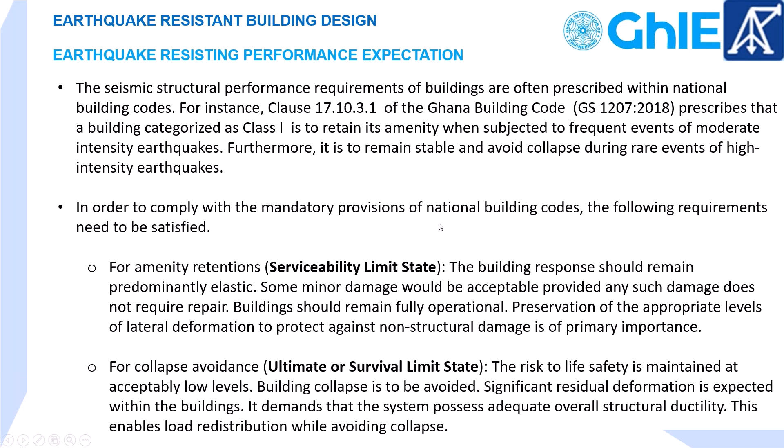There are various types of earthquake resistant structural systems that are available, and I'm not going to go through them again just for the sake of time. We have the moment resistant frames, we have shear walls, which have been explained, we have braced frames. Braced frames, I think there's one structure in Accra, at the airport, which shows this, and that building also has base isolators. That is the #1 Airport Square. It has bracing, and then it has base isolators.

Then what we use in Ghana, there is confined masonry walls, where you construct your walls and then you box your columns in there and construct. It is said that it has some level of resistance to earthquake. But at the end of the day, it is all about how the construction is done. Because if you have all of this and you don't have adequate reinforcement, then in Turkey...

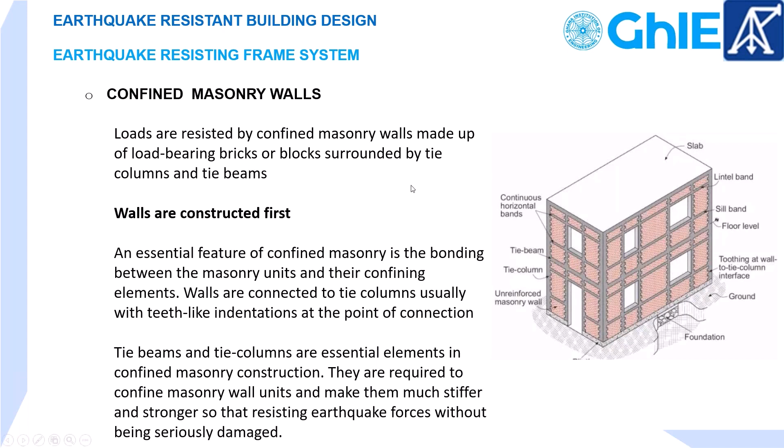The most frightening and terrible after effect of earthquakes is that stresses accumulated over time in the earth can cause serious damage to buildings and other infrastructure. If an earthquake occurs in a populated area, it may cause many deaths and injuries and extensive property damage. We cannot prevent earthquakes from occurring, but we can build better to avoid building collapse and, as a result, loss of life.

The seismic performance of buildings depends to a large extent on the building configuration chosen. It is therefore important that architects are aware of the issues involved and they work closely with structural engineers at the conception stage. If the configuration chosen is wrong, the building becomes difficult and expensive to design, and the results may not be completely reliable.

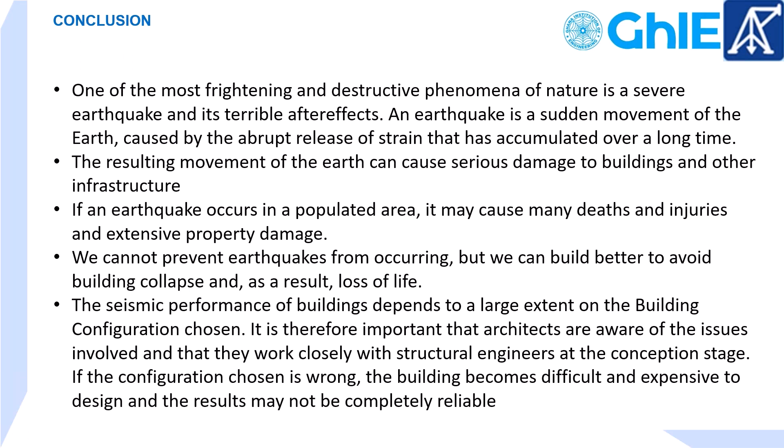Ghana's earthquakes are intraplate earthquakes. They are caused by fault systems in the Atlantic fracture zones. Ghana has two recognized seismogenic regions. We've mentioned that, and the Accra-Ho region continues to be seismically active, and the causative forces are responsible for the majority of Ghana's past and current earthquakes. The Accra-Tema corridor of the Accra-Ho seismic region is Ghana's most active and vulnerable earthquake zone.

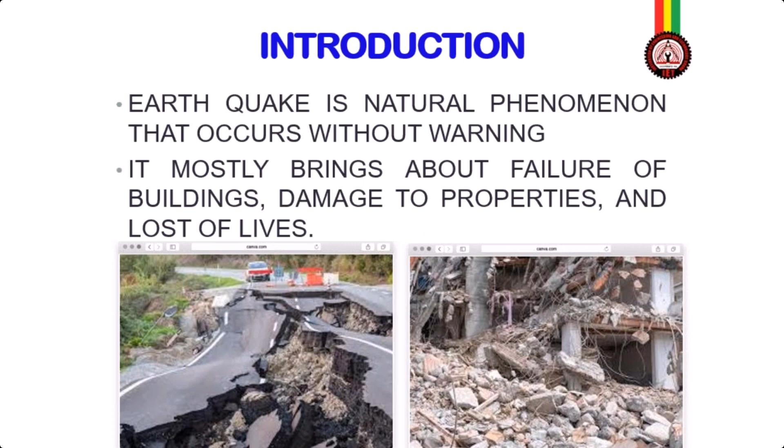Now, effect of earthquakes in Ghana. Effect of earthquake in Ghana is mostly damage of properties and loss of life, as I said. In the recent happenings in Turkey, we know what happened to our dear brother, Christian Atsu, who was one of our famous footballers in the Black Stars. Not only death, we also experience injuries, as well as buildings and other properties being destroyed. So it's a great concern when an earthquake happens.

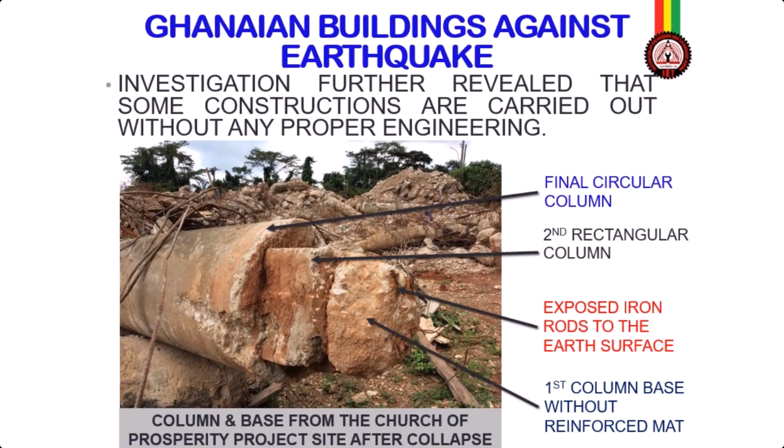A mass concrete. It's not a reinforced concrete as a column. So can you imagine what will happen in Ghana should that thing occur here? These are some of the columns that I said. And the concrete, when we measured, was as low as 12 Newton per millimeter square. And that was a structure which people were worshiping in.

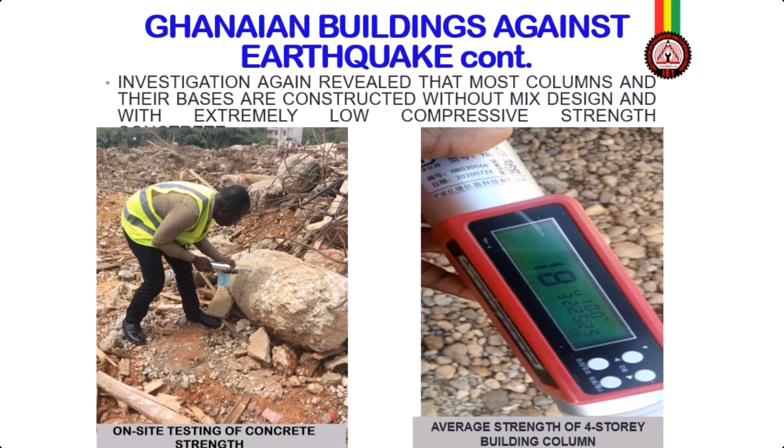It was up to the 4th floor. So the concrete strengths were very, very weak. And you can see as the picture depicts. Alarming rate of building collapse under self-weight in Ghana, not to talk of earthquake.

In recent times, we have Airport, a building collapse, 4 people injured; Cantonment, uncompleted buildings collapse, 3 people died and 18 sustained injuries. New Boy Town, it happened, 1 dead, another collapsed, in that order. So when even 1 person died, it's a matter of concern, not to talk of 22 people who perished at

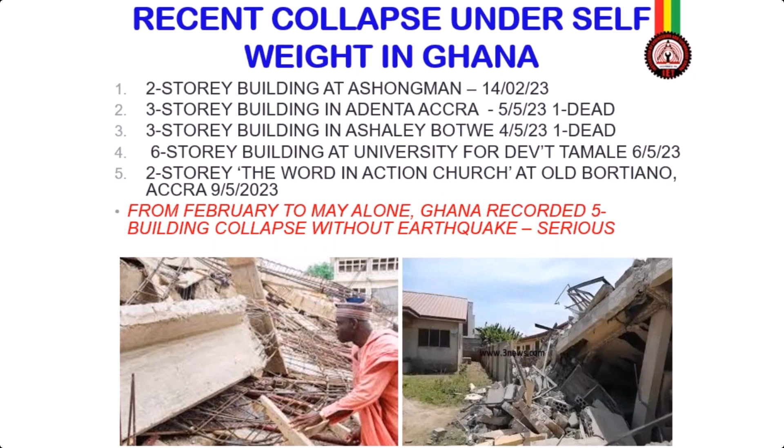Following our past earthquake experience and the rate at which our buildings have started collapsing under self-weight, Turkey's experience must be a red alert for our professionals moving forward. Our designs must factor in resilience against earthquake. So here, we don't have many earthquake structural designers, but now we have an opportunity.

Prota is giving an opportunity to those of you who are into designing to upgrade your knowledge. I think it will be a very good market as well when you get that knowledge, so that we can give technical advice or be a trainer of trainers to other engineers so that they can do what is right. Not only in designing, what about when we are implementing the design, the construction? What we see, a lot of developers don't engage professionals even after it has been designed. That's what we have witnessed.

When you go to the site, you see a lot of these craftsmen doing what an engineer or professional is supposed to do. You'll not be surprised seeing a draftsman designing up to 10 or 5 stories, which in my opinion, they are not supposed to do, while architects are there. And for structural engineers, you will see CAD technicians doing structural engineering, and they don't have the basic structural mechanics. And they still go ahead and design.